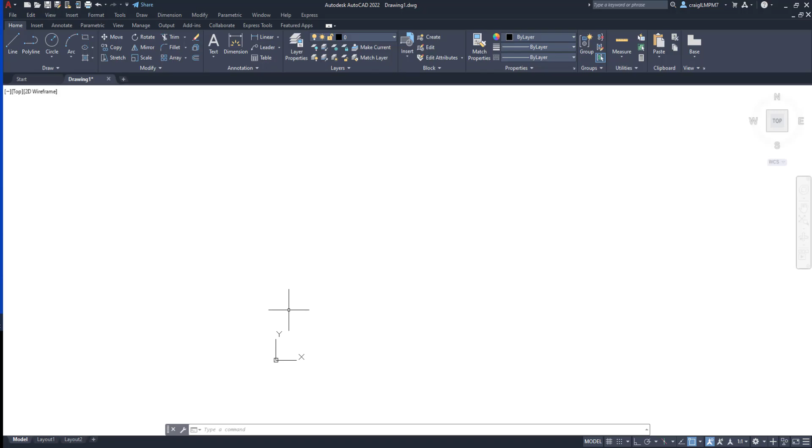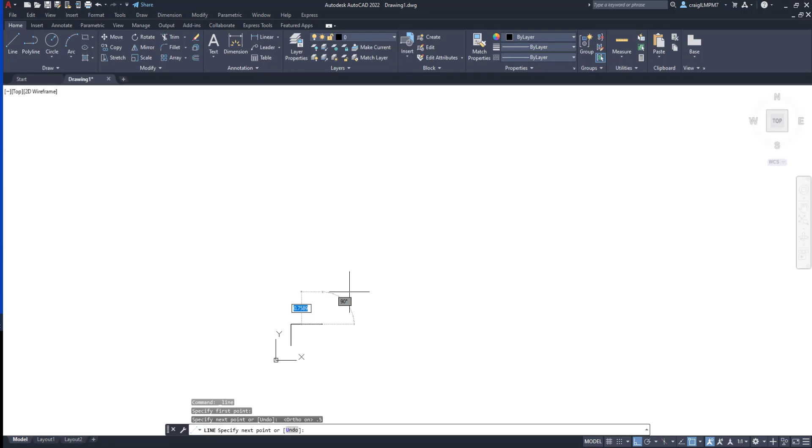So let's get started. I'm going to draw a line down here. I'm going to start near 0, 0. See if I can get it to cooperate. So tell it I want a line. I'm going to turn orthogonal on, so F8, and I want it to be 0.5 wide, and I want it to be 0.75 long, back 0.5 down, and back to where we started.

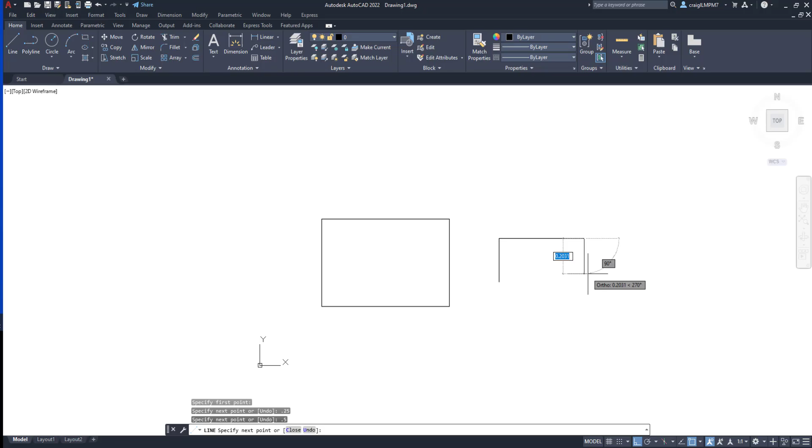So let me make this a little bigger. So there we go. So I've got that part. Now I'm going to draw the second half, which I want this one to be 0.25 wide and 0.5 long. So now we have the two shapes.

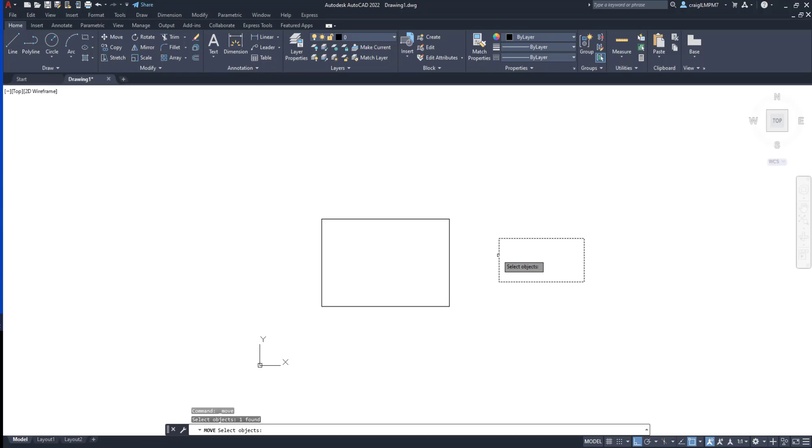I want to turn this one temporarily into one object because I'm going to move it. So type join, enter. Now I can come up here and get my move tool, select my object, press enter, and I'm going to use the midpoint snap to snap from one to the other. So now I've got my object the way I want it.

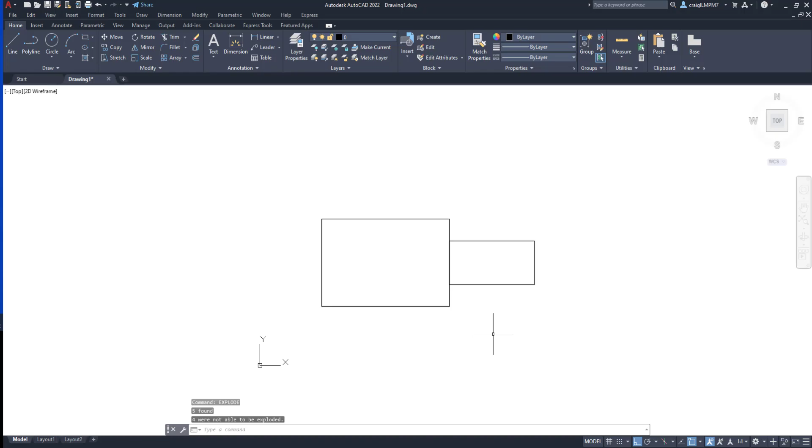So I'm going to go ahead and explode it again so I can edit it. And I don't need this little line right here anymore, so I can delete it, and the other one I can trim out, so I can trim that, and that's what I wanted.

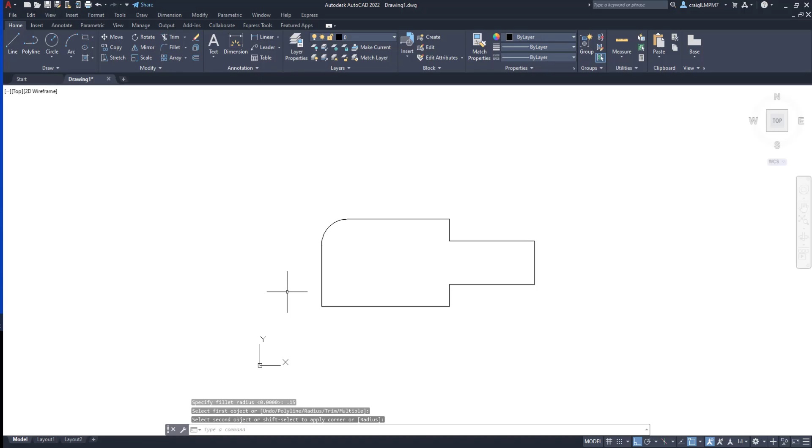So moving on, we can come up here and get our fillet tool, and it says select our first object, but it doesn't know what we want it to do. So I'm going to type R, enter, and now I can tell it I want it to be a 0.15 radius. Now I can select my first line, select my second line. There we go. And if I press spacebar, I can simply repeat the function, which saves a lot of messing around. And there we've got half of it done.

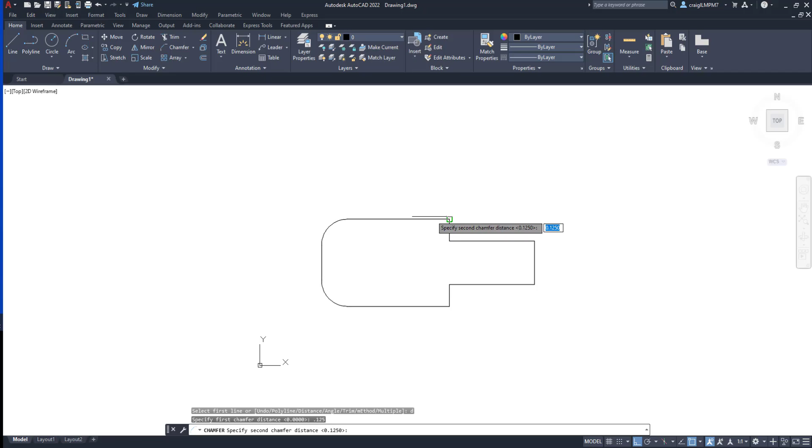Now I'm going to chamfer the other end. So I'm going to select chamfer, and it's saying select first line, but it still doesn't know what I want it to do. So we're going to deal with that first. And we tell it D for distance, enter, and 1/8 of an inch, 0.125, enter, and then you have to tell it a second distance because you're offsetting. First you're offsetting from the corner this way, and then from the corner that way. So you have to tell it 2 distances.

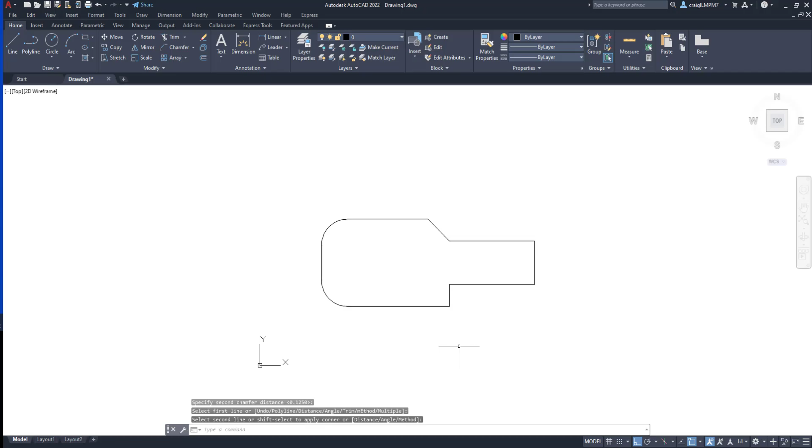Now I can come over, click on my first line, click on my second line, try it again. Chamfer, R, enter. Come on, AutoCAD. Chamfer, R, oops, sorry, D, enter, 0.125, 0.125. So now we can select our first line, select our second line, we're good. Repeat with spacebar, do it again.

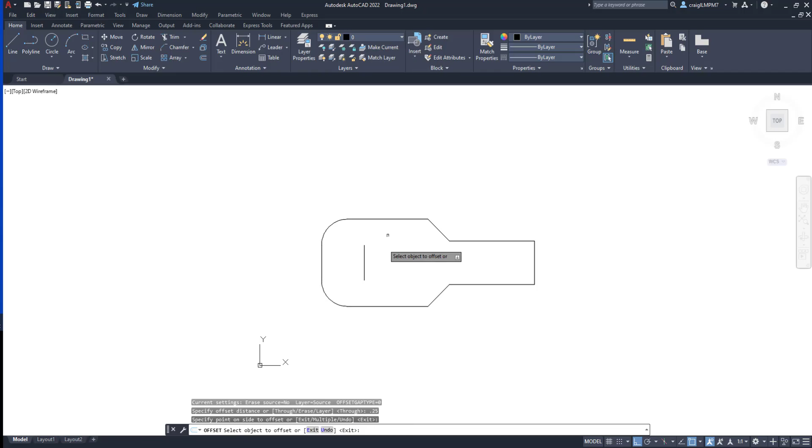Now our object's close to what we want it to look like, but it still needs a hole in here, and the hole needs to be centered 1/4 inch in. So one of the easier ways to do it is I'm going to select my line, come get my offset tool, and tell it 0.25, enter, make sure we're inside, click on it, hit escape, and now we need to create a 5/16 diameter circle. So center diameter, come get a circle, tell it you want it to be 5/16, enter, and now we don't need this line.

So making significant progress, but notice these are all in separate pieces, and that's going to make it a little bit more work if we have to select each piece all the time. So I'm just going to select the whole object and tell it I want it to join. So now I've just got two objects, which is fine. Makes it a whole lot simpler.

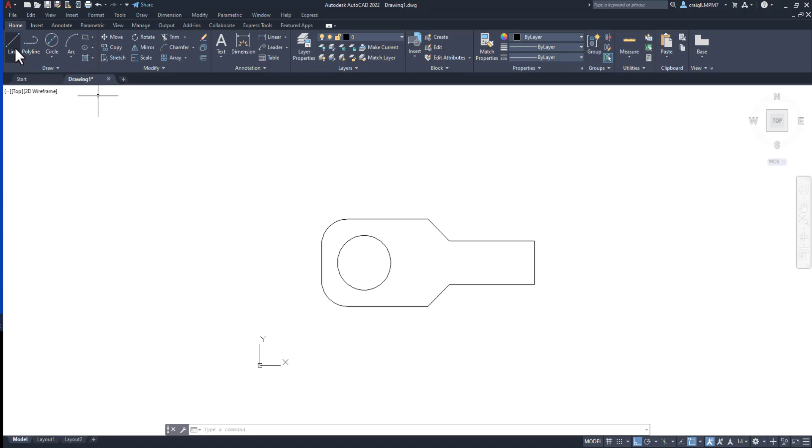So we need to make 8 of these equally spaced 1/8 of an inch apart. There's multiple ways to do everything in AutoCAD, but for this I want to use the mirror. So I'm going to come up here, get a line, I'm going to snap to that edge right there, and it needs to be 0.125. So draw a little line, hit escape.

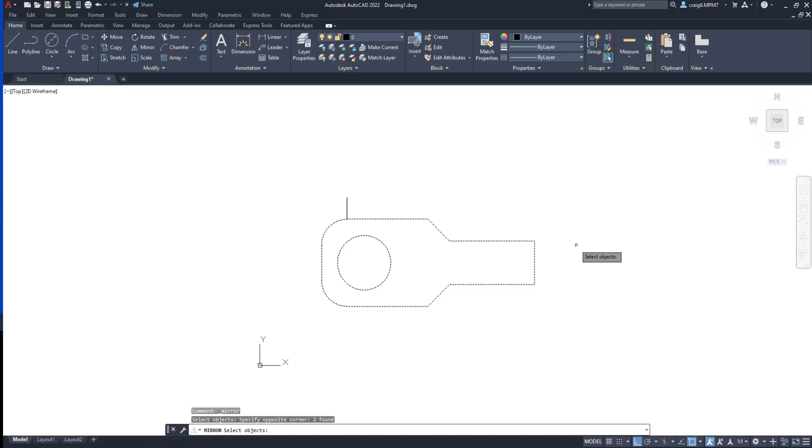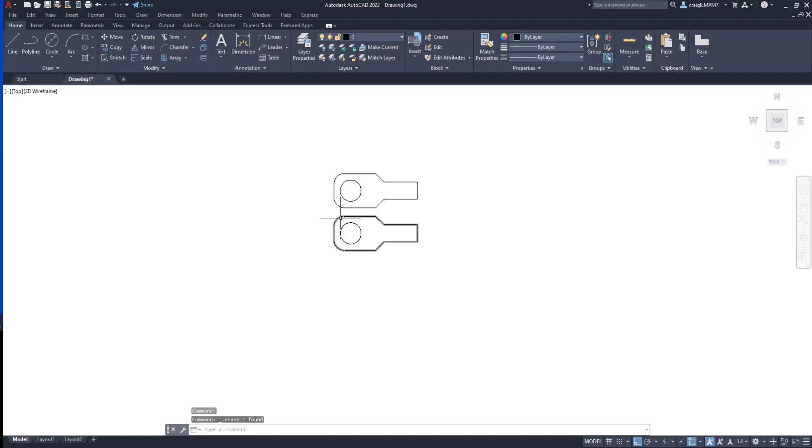Now I can come up and grab my mirror tool, select, I only have to select 2 objects now instead of all those little lines, press enter. I want it to snap around the midpoint of the line I just created. And once we've got it, we don't want it to erase the source object, so we tell it no. Then we just need to make this little line go away, and now we have 2 of them. So we can repeat this process.

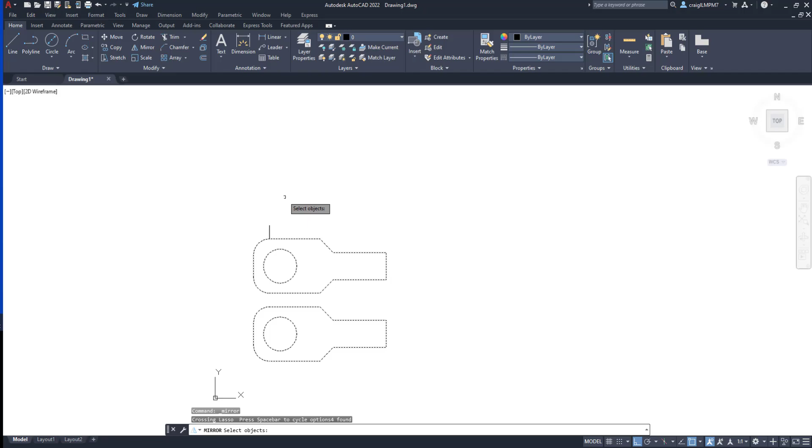Line, snap it from our corner. We want it to be 0.125 again. Keep our spacing. Hit escape. Grab our mirror tool. Select our objects. Press enter. Snap to our midpoint. Tell it no, and now we have 4 with an extra line, which is going away. So now we can repeat the process one more time.

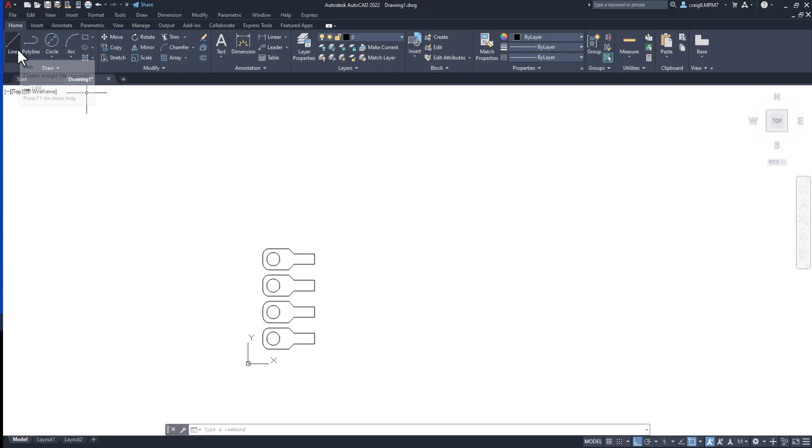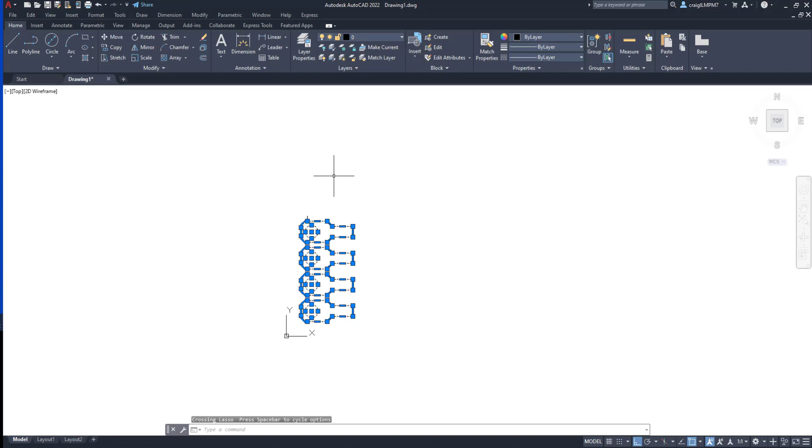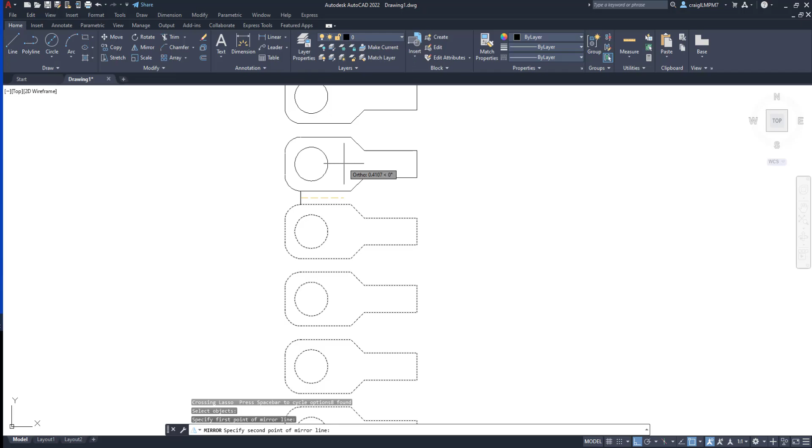So line, snapped from there, 0.125, enter, escape, and then we can select all 4 of our objects. Oops, sorry. Go get mirror first, then select all 4 of our objects. Enter. Make sure we pick up our midpoint, flip all 4 of them up top, tell it not to erase them, and then delete this little line, and now we have 8 of these things. Which is nice because we want to turn them into a block.

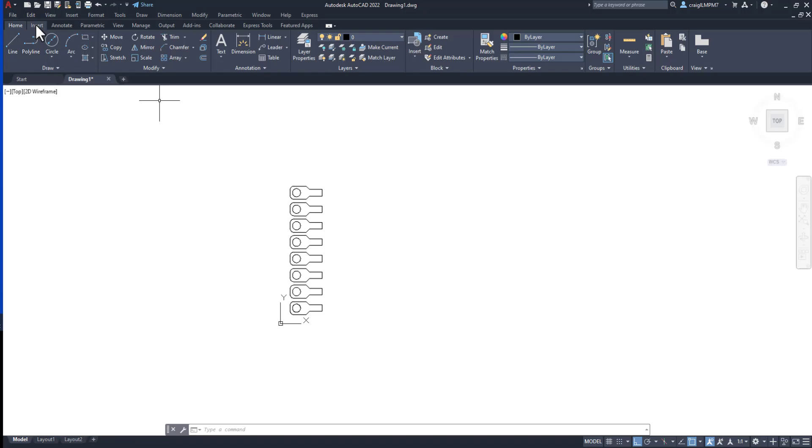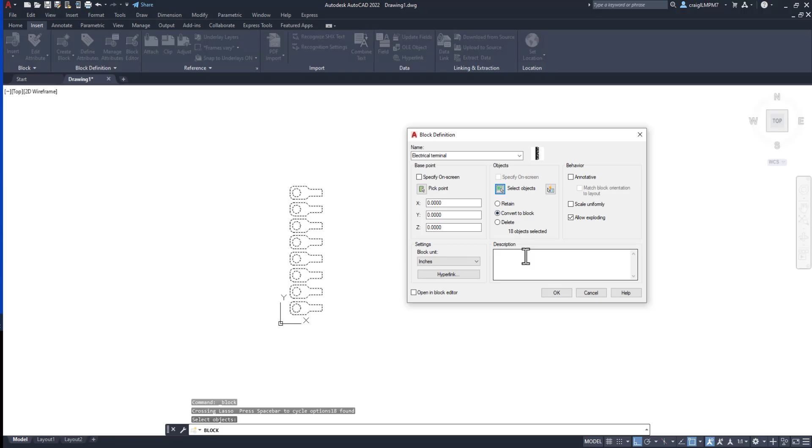And the reason we want to turn it into a block is so we can insert it into any other drawing we want. So come up and we can go to insert, go to create block, tell it create a block. This one we're going to call electrical terminal. We can click select objects, select our objects, press enter, brings us back to where we were, tell it OK. So now we should have a new block.

So we can come up here, go to our insert, our block appears there, and we can just drag it down here wherever we need it, and now that's an easy way to have a bunch of these ready for whenever we need them. So that's it for this lesson.